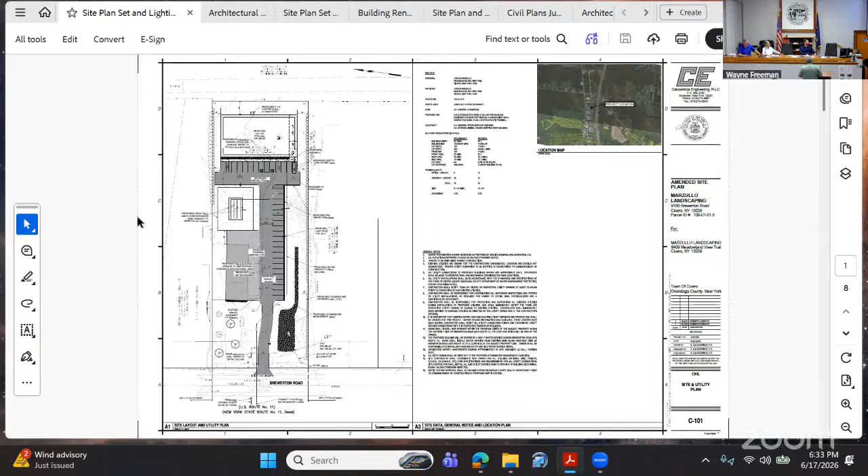As part of that additional structure, the stormwater detention facilities currently on site are going to be modified. A septic system is going to be installed because there will be a bathroom in the new building. There isn't going to be a bathroom added to the existing building, just the new one. So the septic system will serve just the new building. A new water service is going to be added to directly feed the new building.

Additional parking and paving improvements are going to be made on site. Site plans were revised based on engineering review comments, some comments from the board at the last meeting, and some additional comments that we received throughout.

We did add landscaping, a detailed landscaping plan. We also updated the architectural drawings based on comments that came back, relative to landscaping and to the building itself. There were comments regarding the building itself.

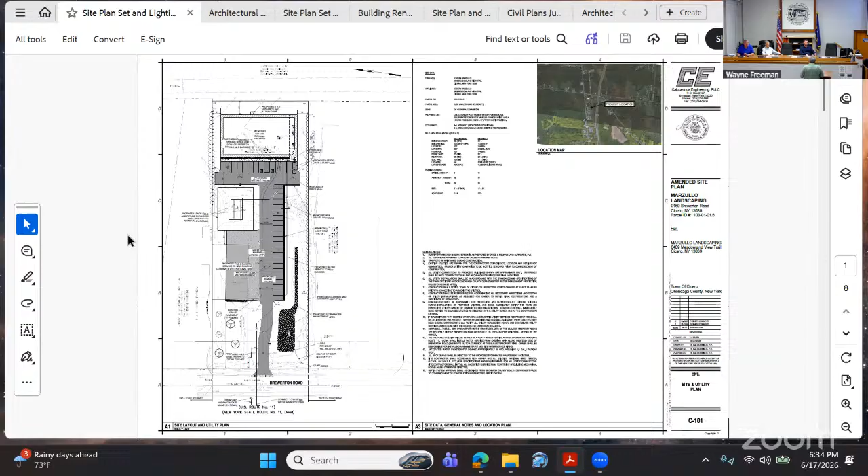One was that we need to add a light at the overhead door at the rear of the property. That overhead door at the rear is just so they can bring in an athletic training facility, so if they're bringing in soccer goals or any kind of goals or other appurtenances, they'll bring it in through that back door. So we'll provide a light. There really isn't an issue with that.

For that back door, on your lighting plan here, you've got lights back there, but you'd have to connect it over. As long as the exit is illuminated on the building, you don't need it directed right there. If you provide enough illumination along the way to the rear, that looks fine.

I think the wall packs that are there would be sufficient, but done in a way to meet it. The overhead door and the man door are right in the center of the building, so they're centered between those two lights.

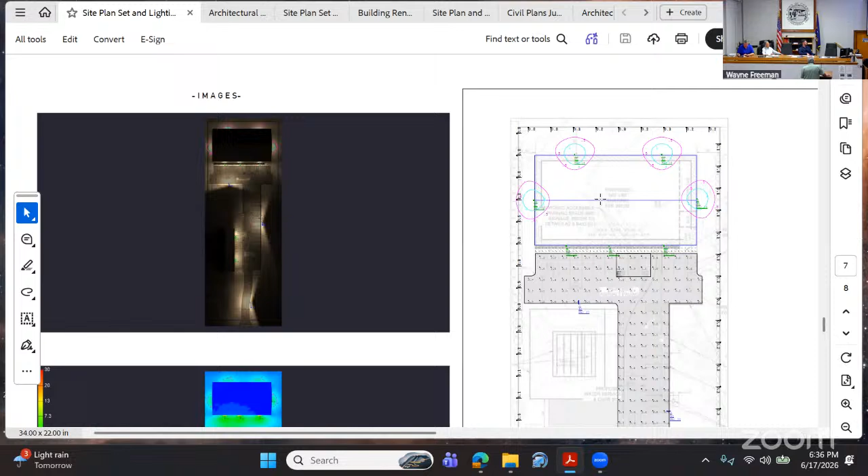The second comment was that the primary facade does not meet minimum transparency requirements, which is 35% for this proposed use. Right now, this graphic was prepared by the building manufacturer. The architectural plans show 4 windows, about 6 foot by 3 feet each.

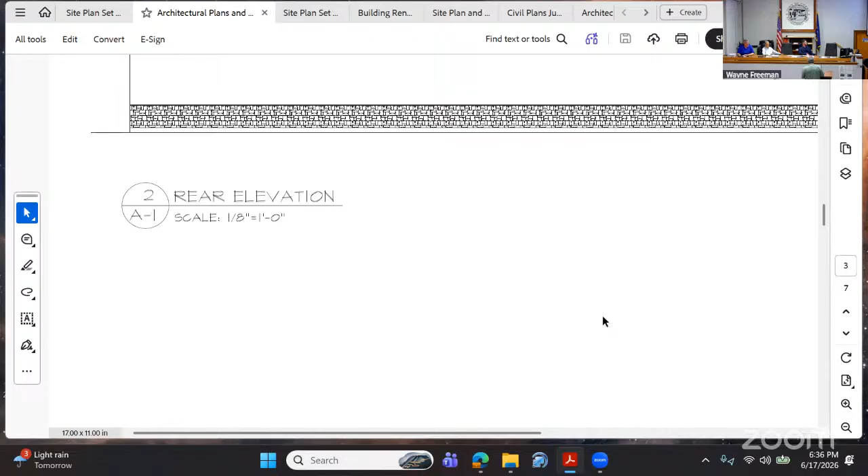That works out to about 72 square feet for transparency. Based on the face of the building, which is 2,800 square feet, the building would be required to have 980 square feet of transparency. So it's either 54 of those windows, or some other solution.

I was just talking to the applicant. He'd consider maybe putting a transparent strip, perhaps in place of those windows, that runs the full face of the building.

To increase that percentage, I don't know that we'd be able to get to the 980 square feet, but we could get as close to it as possible. The building is going to be a metal sided building.

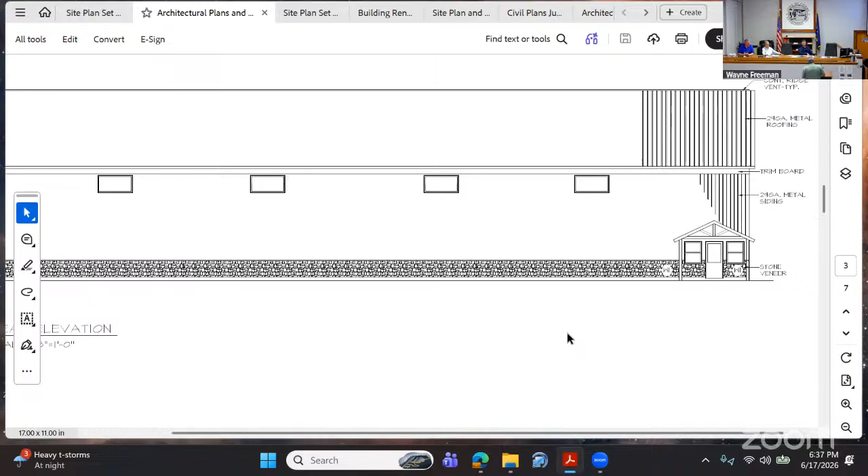It's going to have a standing seam metal roof, I think blue. Sides are going to be metal, gray, and on this drawing it's shown as blue metal, but it's actually going to be probably a stone or faux stone band all the way across the front of the building, just to dress it up a little bit. That's what's being proposed right now.

The last comments were about any vents, fans or mechanical equipment located on the exterior and visible from the road. There's no mechanical equipment scheduled to be on the outside, but there will probably be vents and things like that coming off the building, so we'll need to add and provide those, but I think that's minimal. They're on the right side of the building, behind that entryway.

There are two bathrooms, a men's and a women's, and a vanity. So if there is any equipment in that area, it would be on this side of the building, coming out that side, which borders the Cessna property, an auto sales and detailing facility.

The last comment was just to provide a material finishing plan, still that we provide, but I think the color selection is represented here. Again, it's going to be metal sided, with stone on the bottom.

I have a couple pictures here, but I think the closest thing we could compare it to would be the MCMI building towards Mud Mill Road, at Country Machinery. They have a similar style building, I think it's metal sided, may have a shingle or metal roof, but they've also got a band of stone on the bottom. That's really what we'd be looking at and replicating here.

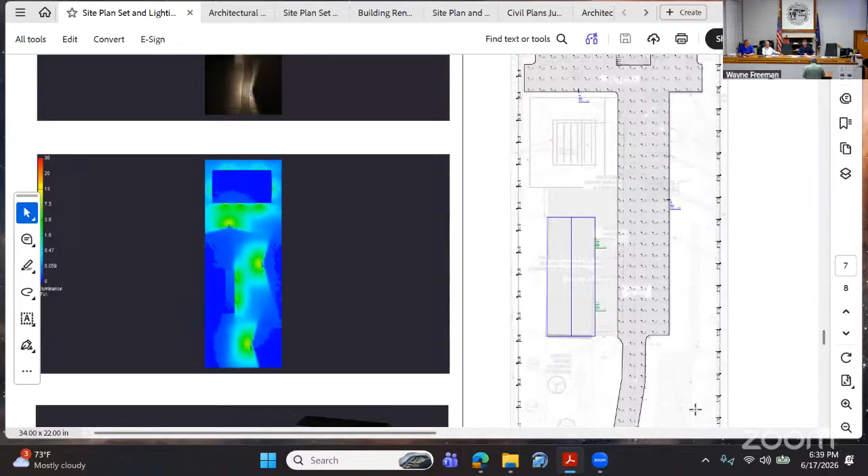Beyond that, on the landscaping comments, I actually failed to thoroughly read the landscaping requirements, but as pointed out, trees are required at one tree per 40 linear feet of building perimeter, which works out to 11. We have 7 trees provided on the property. We can certainly add a couple more trees.

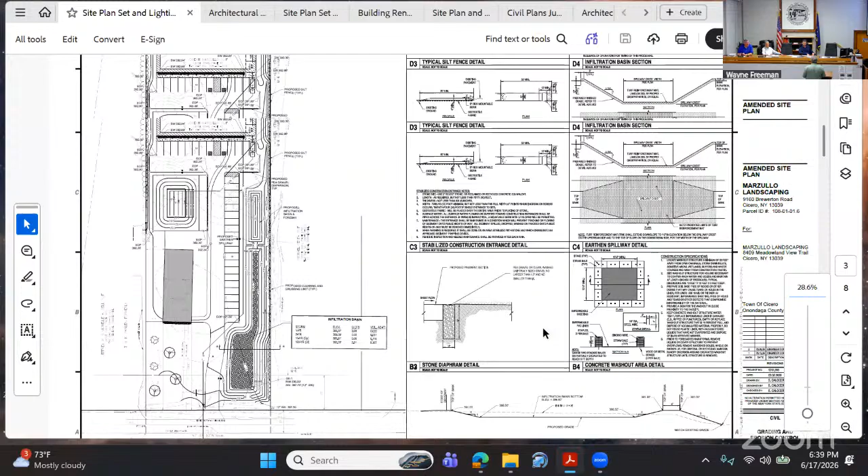Then shrubs, it's one shrub per 10 linear feet of building perimeter, which works out to 44. On the landscaping schedule, technically we call two of them shrubs, but the rest are plantings, perennials and annuals. There's a total of 56 of those plantings in addition to the 2 shrubs.

We can certainly look at increasing that number, but I don't know if you want to consider those shrubs or not, but we do have the front of both buildings, the existing building and the new building, pretty well covered in landscape.

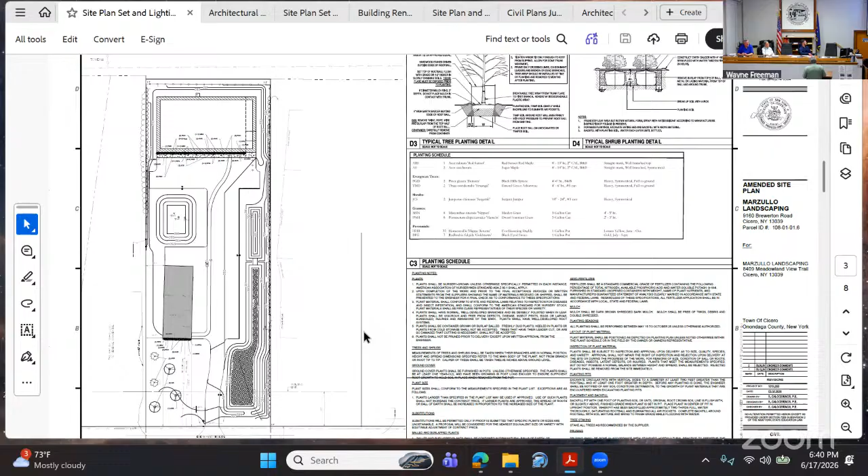That's really it, or are there any other questions or comments? I was going to read through all of them, but you just did. Okay.

Mark, what is your input on this? As far as the landscaping goes, I think it's up to the board to look at the plan and decide if they want to request any additional landscaping, or if they feel what's being done is appropriate.

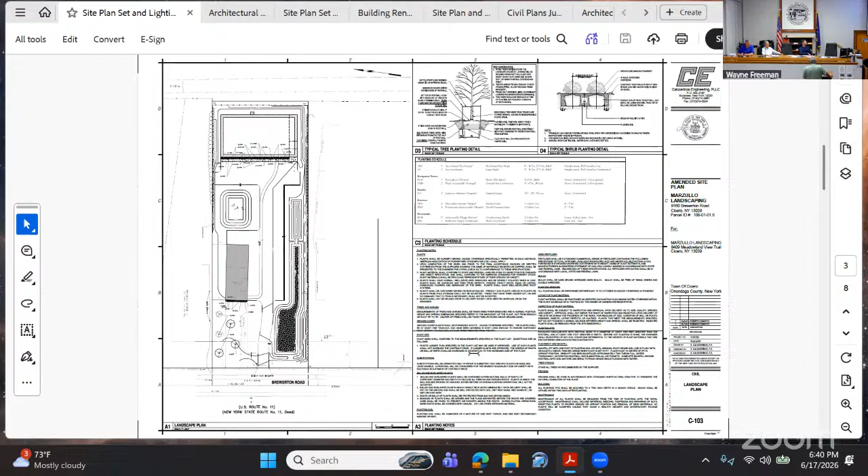On the lighting, I think you're covered. The only comment I had was I don't personally see the need for these lights on the north and south sides of the building. There are no site features there, no entrances or anything in those locations. So the board can decide whether they want to leave those there or not, but I don't see any real use for them. As far as the architectural elevations go, as Steve mentioned, if you look at this plan...

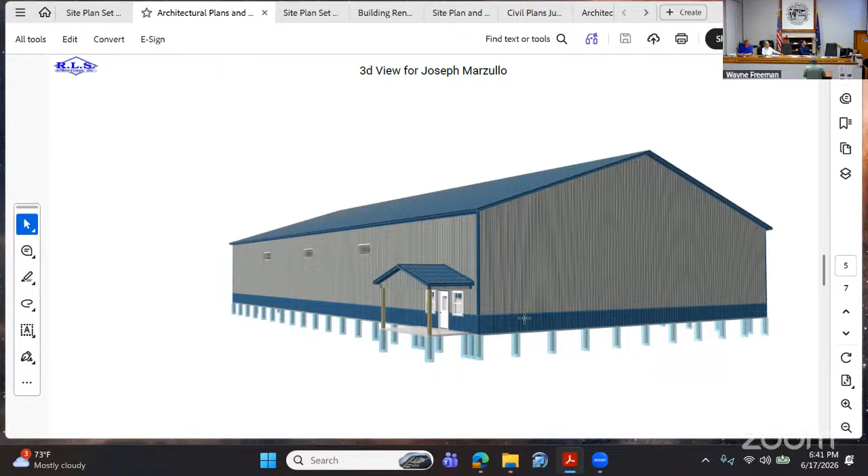This is represented here as blue in color, which I don't know is really the intent, but it's also shown as the metal panel, whereas this is calling out a stone veneer. I think there are some other discrepancies too, mentions of windows and those types of things between the two sets of plans, this elevation and the renderings. I would like to see those resolved.

I think more information, as was in the municipal design review comments, is needed relative to the color of these and what you're actually getting there. So I do think that needs to be resolved or clarified before you approve the plans.

As far as the transparency of the building goes and the amount of windows, again, I think that's up to the board to decide how they would like to have it, what they would like to see there, and if additional windows need to be provided.

So I think the landscaping first, and make a recommendation or suggestion to the applicant. It's the one that is there, but you want more landscaping, or whatever you think there, and if you want the lights and stuff addressed as well.

I'm okay with the landscaping as it is, but Chuck? Well, in regards to the landscaping, I would like to see some more graphics on how the intention of how it will look.

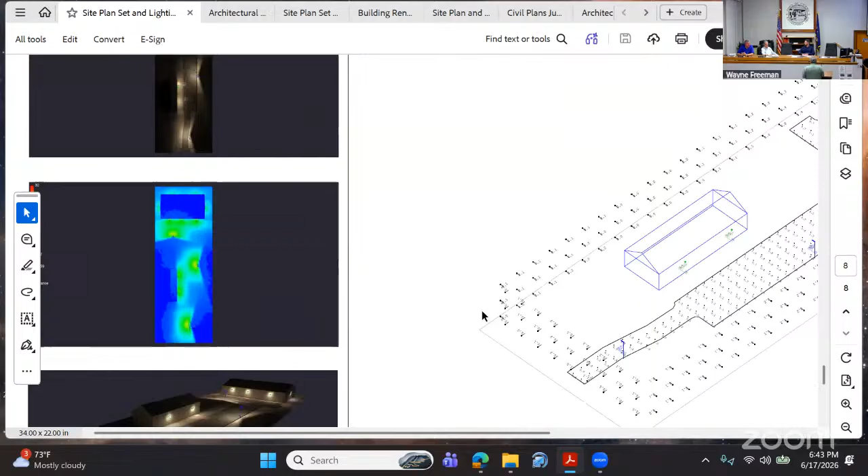Other thing on the elevation there, you're normally looking at two sides. What does the other two sides look like? They might have. And basically, so this would be the front. Right.

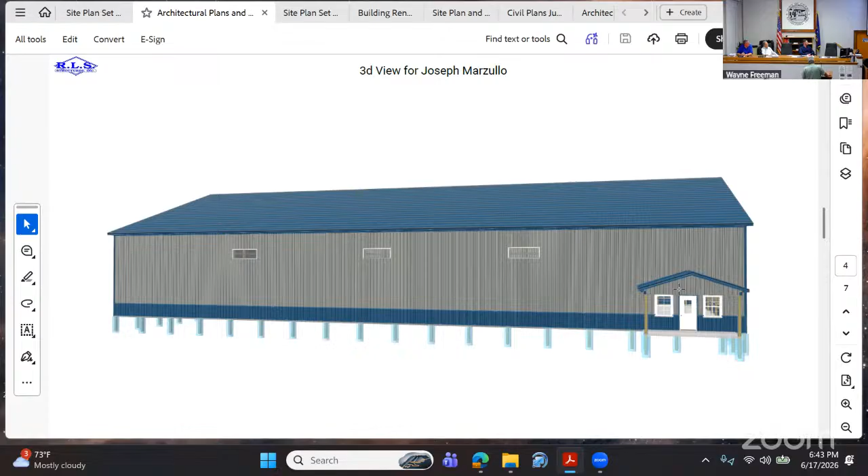Again, the windows aren't quite lining up there. Side, rear, and I don't know if you'll see that from 81. So it's just the one, this is the other side. So those two sides are basically just the metal siding, the rear.

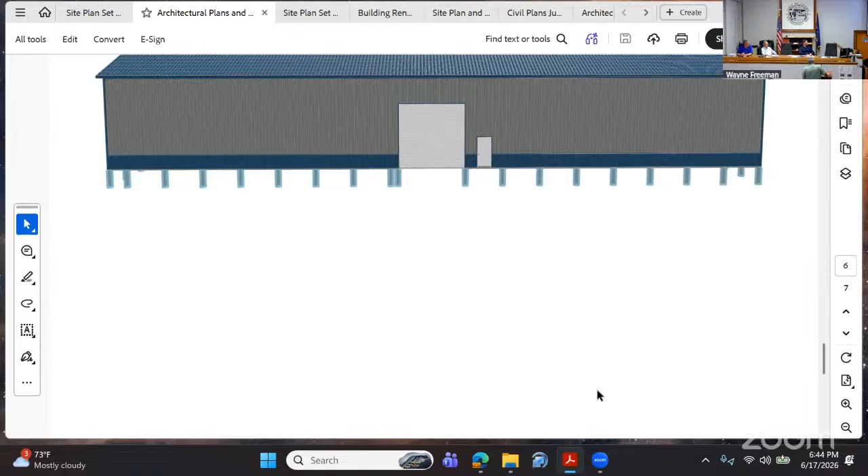And there is the National Grid power line corridor that runs between the building and the property at 81, so there's a substantial strip running through the pipeline. So basically, this is a pretty huge building.

There's only two grade doors and one overhead door. Does that meet any codes for number of people exiting or under? The exit requirements will be based on the total occupancy load of the building, and that's gonna be determined by how the internal layout of the building is set up, and then there are minimum travel distances that are required.

Until I see a set of construction drawings, I can't tell you for sure, but this looks like it's probably okay, and if not, we're gonna have them add another door. Okay, but I'm thinking if there's going to be some sports teams in here, that could amount to quite a few people.

This isn't really a spectator sport kind of thing. Right, this is just strictly a training facility, so they're not gonna have games or matches or anything like that. Folks will come in, do training, we're gonna schedule the time slots, there's not gonna be multiple people getting into the facility at the same time. It is gonna be somewhat limited.

I really would like to see another exit though, because if something happened, people start to pile up trying to get out.

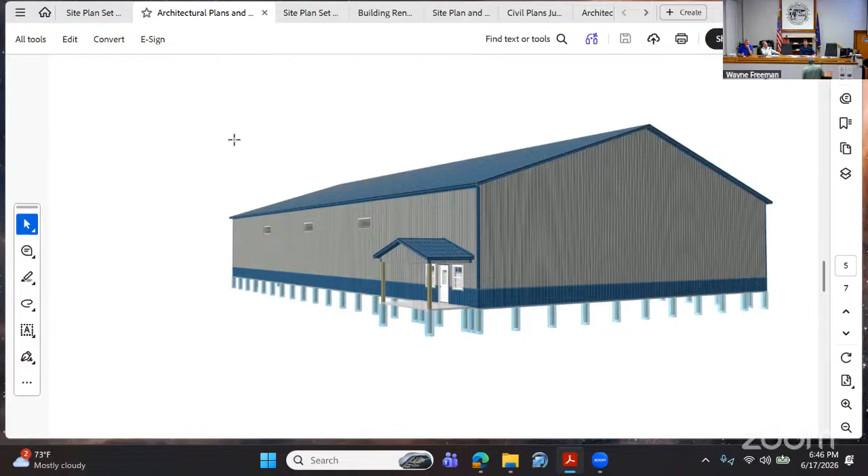Okay, consider- alright, you all set? Well, just one more thing, in regards to lighting, is there any side, not windows, but- let's call them windows for now, to add natural lighting? Or is it all interior lighting inside the building?

Just those three windows currently, at the top. But again, my understanding is the code has a requirement of 35%. I don't know what the percentage is, but it's probably less than 5% with those windows. Somewhere in there.

The size window that's shown on the plan right now would require 54 windows to meet the protocol requirement, and I think that would probably be over excessive. Okay, those are my concerns for now.

Zach? Sure, input. We touching just on landscaping at the moment? Okay, I think I'm okay with the landscaping, I think you did a pretty good job with it.

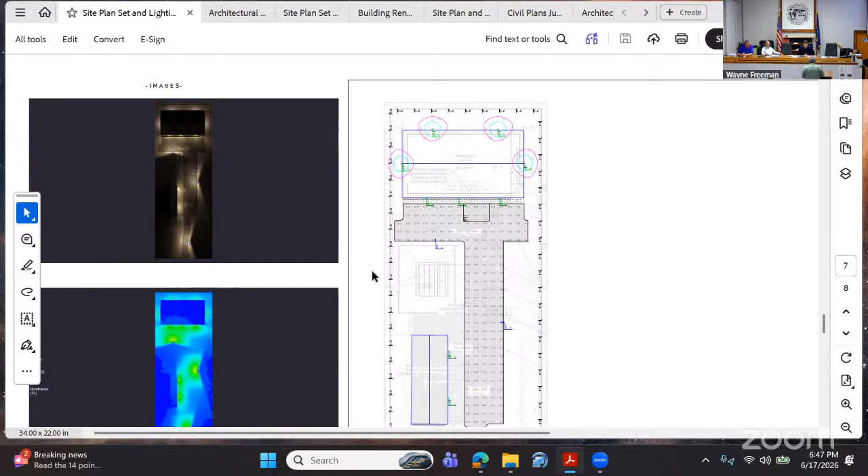Kind of ties into landscaping, I'd like to have a quick conversation about sidewalk. So you're kind of calling for high density gatherings of young adults. I'm bringing this up because I was guilty of it with sports teams back in high school. You might be at a facility where mom and dad don't know where you are, you're on the phone saying hey, I'll just go out to the road, I'll flag you down.

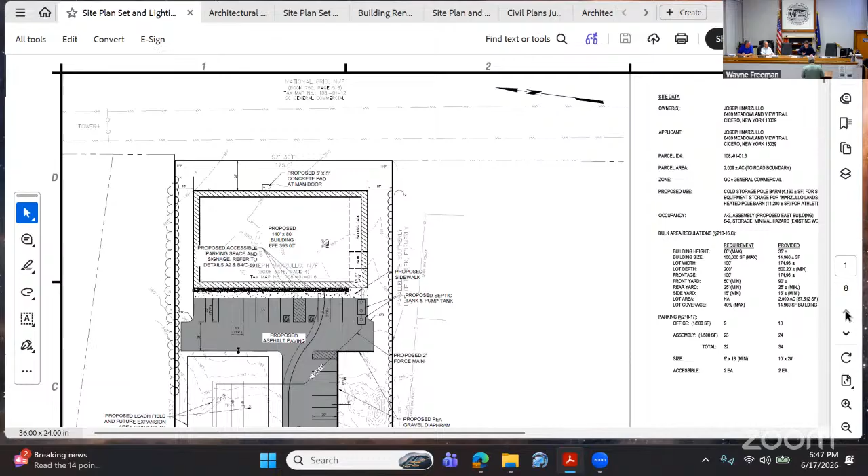You'll see me. Is there any way we can throw a sidewalk in there in the front just to try to prevent, I guess, as many kids as possible from doing what I did in high school?

I understand the argument, the sidewalks to nowhere, but keeping with consistency, we did have a property on Bartel Road with a lower speed limit and streetlights, and we also asked them to put in a sidewalk, which they agreed to do. This is a 40-mile-an-hour zone, there's gonna be no streetlights on the road in that area.

So how would you guys feel about adding that just for safety purposes? So you're looking at roadside? It could be roadside, or it could be kicked in a little bit on the property, wherever we can fit it. I think this section is a 55-mile-an-hour zone, not within my understanding, it's still higher than 40.

Right, okay, maybe this is an older depiction, but yeah, this is. But yeah, even more so if it's 55, that would be partly up to the state DOT, since it's a DOT highway. I don't know, again, you did mention the concern over sidewalks to nowhere, which honestly this would be with the properties that are on either side.

I mean, the applicant's here if he wants to speak to it, but I hate to offer something that would probably end up being a maintenance nightmare more than anything else. We do have the sidewalk along the full frontage of the building, where everybody's gonna be. That existing building up front is still gonna be really a storage facility for the landscaping business.

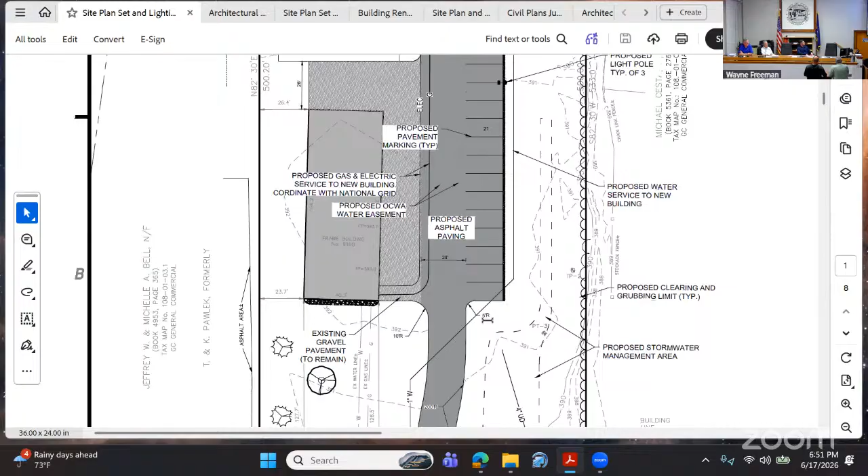It just worries me a little bit being so close to Route 11. Yeah, my goal is not to bring them to Route 11, it's to keep them off Route 11, or off Brewerton Road. So yeah, I don't want a roadside sidewalk.

Do we have room to do a sidewalk between the parking spots along the building and the parking spots? That's gonna be up to you whether you decide where to put it or how to present it, or if you think you have room. But if there's some place where they could flag down a parent that's not roadside, that would be ideal. That's what I'm kind of shooting for here.

I mean, instead of a sidewalk, you just want some sort of pad or something located here, to get them off. Yeah, there. I guess anything to keep them off of that 55 road.

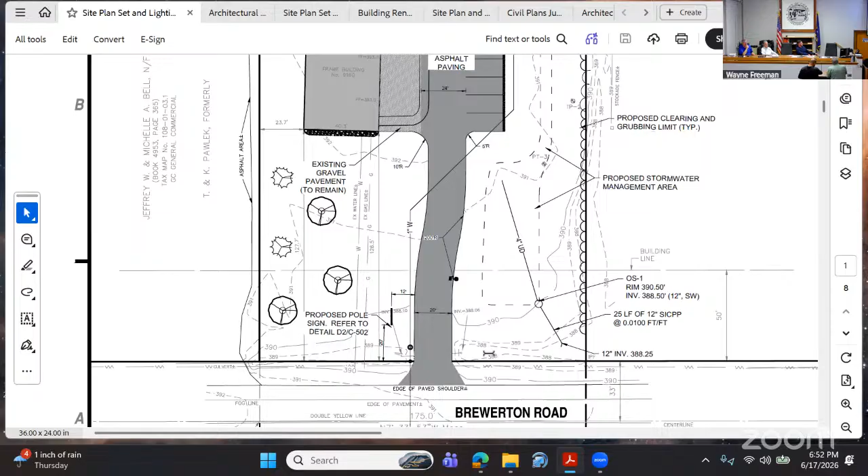We're talking 10 to 20 student athletes at a time, which is the reason that we kind of put that overhang. And that will all be sidewalk underneath the overhang of the building, to kind of have them hang around until the ride gets there, I guess. But that's what we gotta do.

Put a walk in, for sure. I mean, I'm only one vote here. It's just a concern. I just don't want to see... because when I was 15 or 16, you'd walk out to the road, hey, grandma's picking you up, she's never been there before. Hey, you see me on the side of the road with a flashlight?

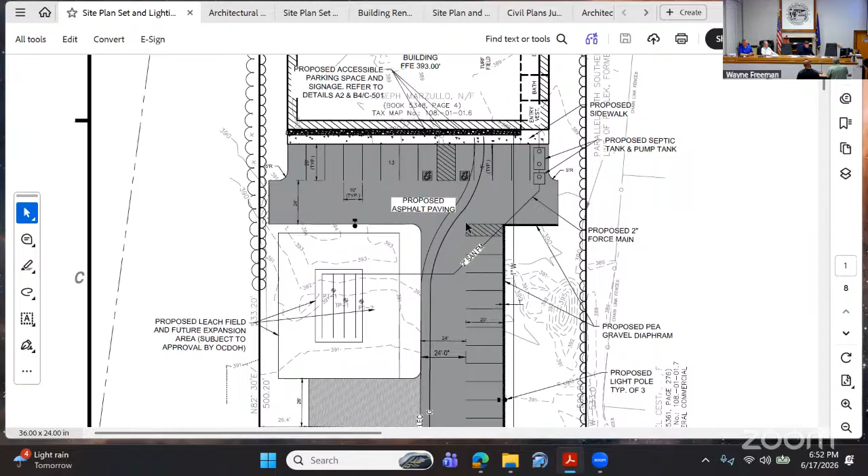Oh, I see you. Just for clarity, we could do something on the north side of the driveway, but on the right side there's an existing roadside ditch that runs along the frontage of the property. Can I see this detention basin? It runs right up through that, so if we did anything, it would be limited to the north side of the driveway.

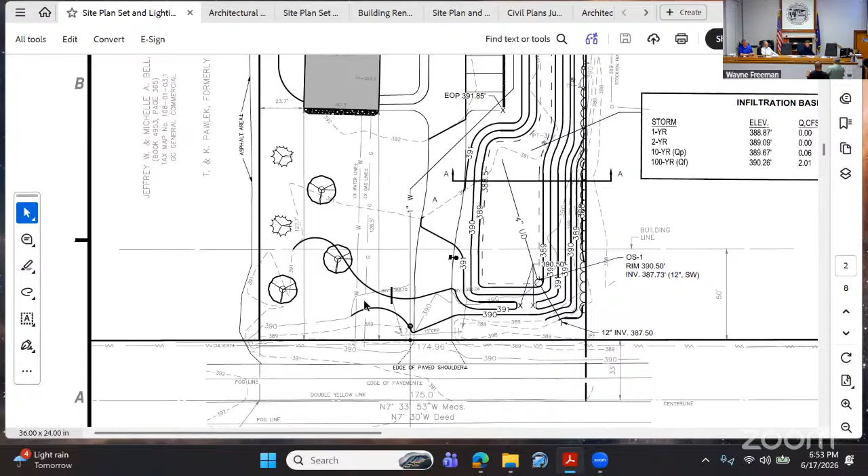Again, maybe a pad or something where they can stand, so it's not in the grass anymore. That'd be very good. If you could give anything just so somebody can stand there as another option to roadside, that would be great. I think that's fair.

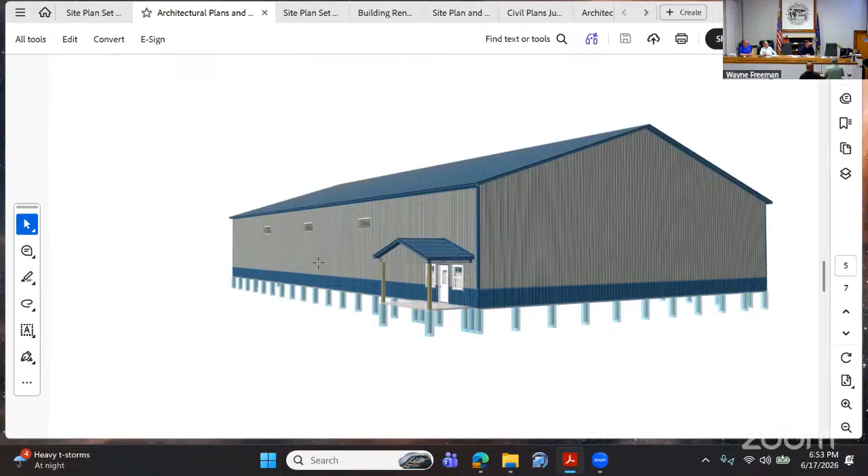Okay, with regards to the facade, what are the thoughts? Do you like that look, or do you want something different?

No, going with the add-on stone on the bottom is great. The doors are one of my main concerns, but the general look, being such a huge building, will make it good or really fall.

It's gonna come down to the building code. As long as you follow the codes, that's great. That's all I had for now.

Zach, for the facade, I think the stone facade that you're showing here would be great. And I agree.

Steve, do you have any questions? No, just a comment - a fire hydrant is being added to the west side of Route 11 to serve fire protection for this building. I met with the fire chief there, and he was good with that location, so other than that, I'm all set.

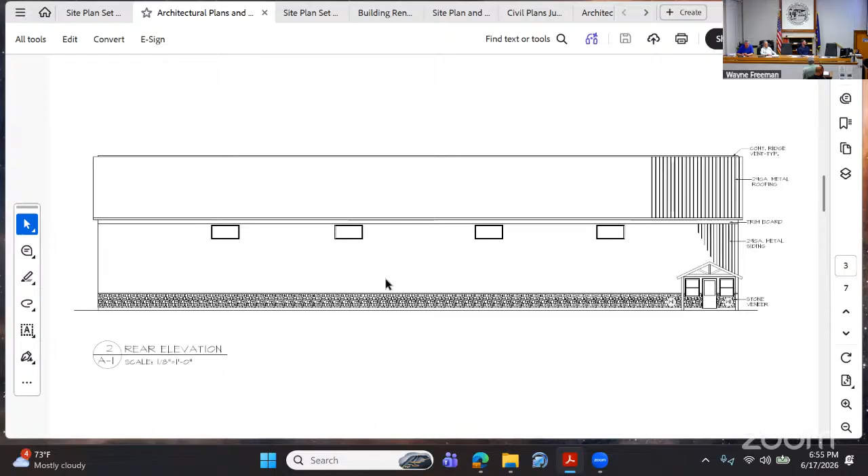Neil, you're all set? Mark, I guess to try and summarize, as far as the building goes, the discrepancy between this drawing and this particular elevation and the renderings needs to be addressed, particularly with regard to the base treatment along with the windows. Is the board good with the number of windows provided, or do you want to see more, larger, or the band that they were suggesting?

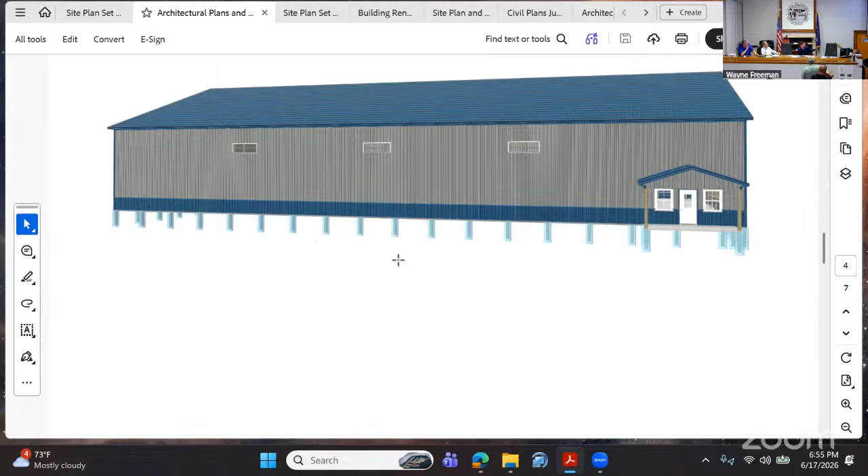I think personally I would not like to see the band. Just seeing post-frame structures like this over time, the bands tend to yellow. They don't look too nice after 5 or 10 years. That's my opinion.

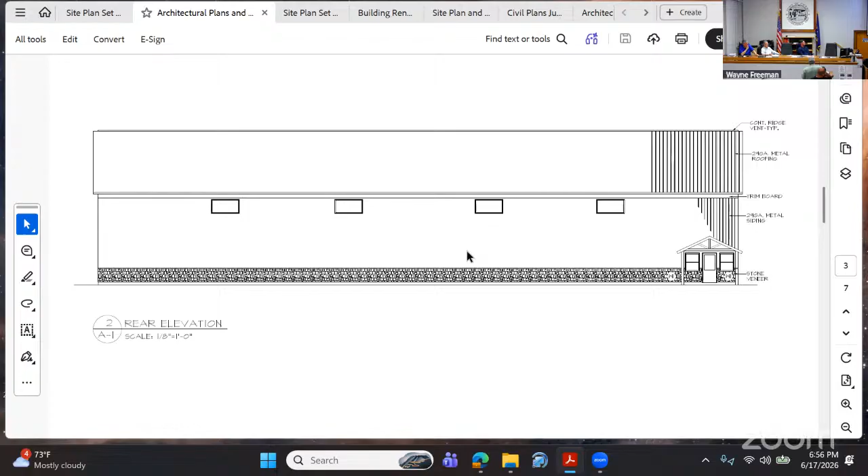Use of the building, I'm assuming you're gonna have adequate lighting inside, you want to pop in a couple more windows, so I'm not hearing a lot of concern with that. Landscaping - it sounded like the board was set, with a desire from some members to provide some sort of waiting area adjacent to Route 11.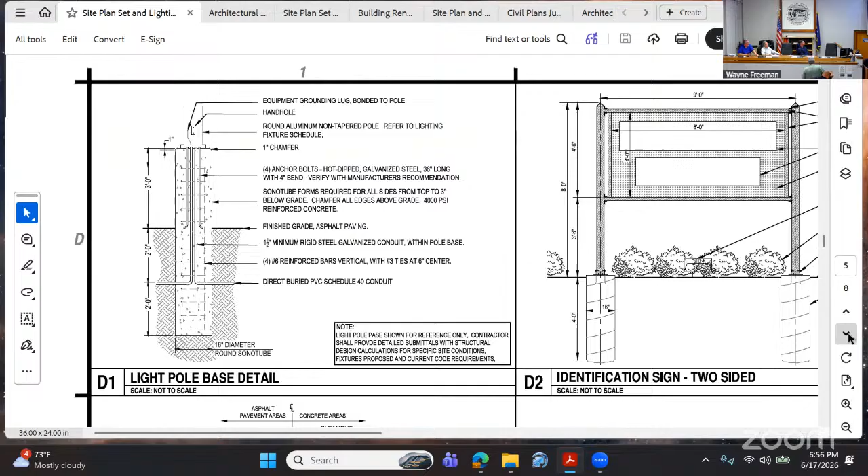Then lastly, a comment I brought up - relative to lighting, is the board okay with the lights on the north and south side, or we first go...

This is the back? No. The south? This is the south. They're showing building lights on the north and south side. If you saw the elevations, there's no door, no windows, nothing over there. There's no sidewalks, no walkways, no driveways - they really don't serve a purpose that I can see.

You have something to say? Go ahead. Being the owner here for a few years, a few doors down north you get traffic in and out - a little motel there, apartment complex - I've had plenty of visitors come onto my property. Theft has been an issue. I had a guy sleeping in my truck one night, broke into the car, all kinds of things.

So that's more so why I recommended that with Steve - more so a surveillance thing, so when I'm running 24-hour surveillance I can actually have those sides, north and south, illuminated so that you can see what's going on.

All right, so I don't have an issue with that. That would probably be a good idea for security if it's needed. More so a security - I guess I just ask that the correct lights get put in, as opposed to what got put in on the previous building, one of which is gonna show to be replaced on this building. So if the appropriate lights get put in, I don't think it's an issue.

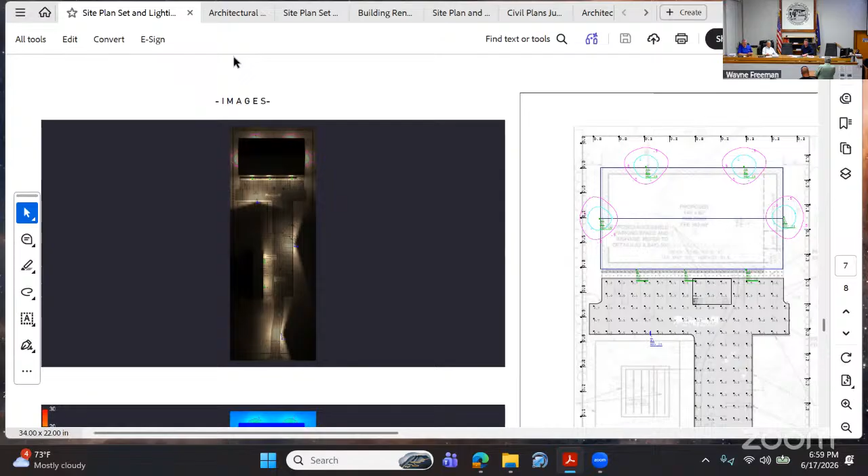Okay. All right, thank you. Thank you.

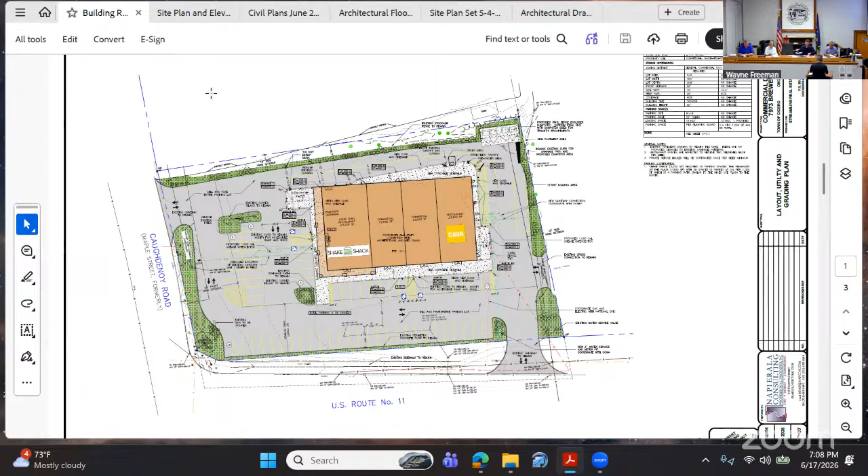In the next agenda item, this is Next Choice Property Holdings, for a proposed baking goods store, Holland Farms, at 5866 State Route 31.

Good evening. Oh, wireless, fancy, you guys upgraded. It's been a while since I've been here. Members of the board, nice to see you again. Christian from Kepling and Freeman Associates.

Heidi gave us a comment letter last Thursday. We addressed it, submitted it. She also sent a comment letter on Friday. I addressed it, I have it in hand. I'd like to distribute some 11 by 17s to you. Absolutely, we can work wonders, but not everything.

So basically what I did is I put together a response letter to those comments, comment by comment. And I have the plan obviously updated with the subtleties, and I'll go through this comment letter.

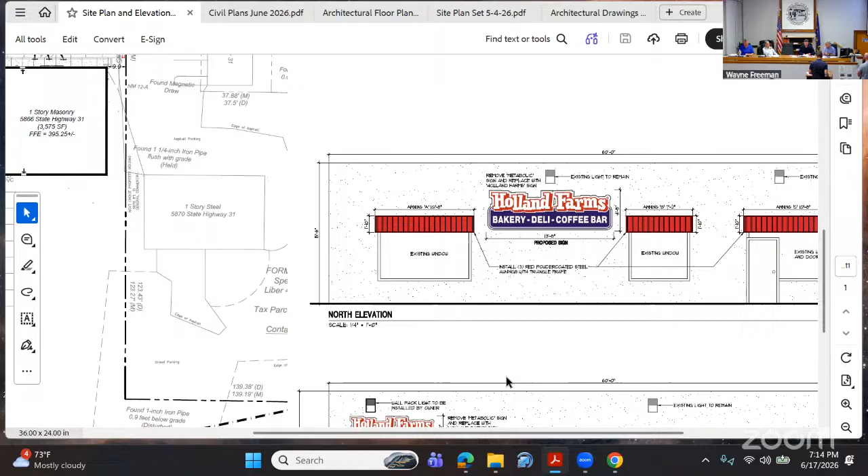Number one, confirm if existing site lighting provides sufficient light levels throughout the existing parking area and dumpsters. The site lighting provides sufficient lighting throughout the existing parking area, except in the northwest corner because of the broken exterior light, which will be replaced. KFA has provided the location of the proposed replacement light - we need to add Mark's swapping of the fixture in there as well, so I can note that.

There was also a comment mentioning dumpsters. Ryan and I talked, and the dumpster area is going to be serviced during daylight hours. The back of the site is sort of forested - there's no people or traffic coming through there, and there's also no electric pole back there. So we were kind of hoping to just not put a light fixture there, and see if the board was open to that. I personally think you can let the critters in the woods hang out back there and take the trash out midday, have the truck come by before 9pm, and everyone's happy and we don't have to buy a light fixture. So leave that one up to the board.

I think one of the comments relative to the dumpster was whether it was sufficient for the use - that right there seems to indicate it's not. Are you going to have two dumpsters, one dumpster, what are we doing there? What do they operate out of in Manlius, Ryan? I'm not sure - they saw it, we walked the property together, talked about it, and they said it was adequate for what they're doing. I'm not sure why Metabolic always had their dumpsters like that, but we built that for them based on the specs that were approved for the site plan. We looked at that too - it's kind of embarrassing.

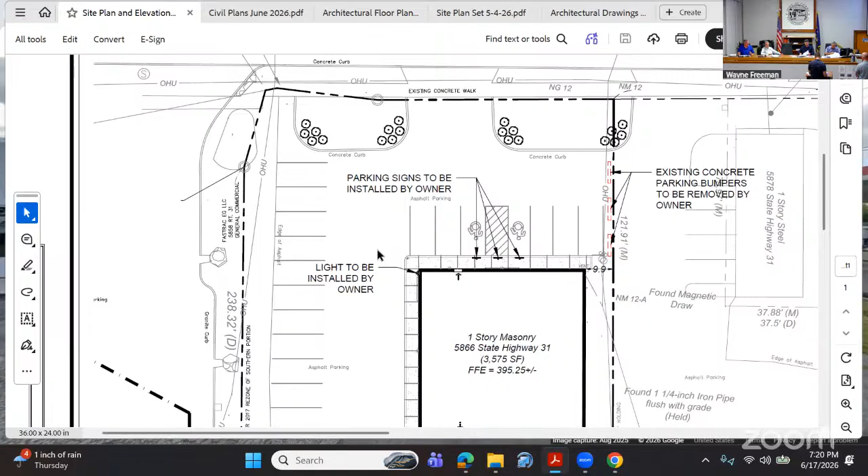Anthony's noting that the signage is beyond the approved code requirements for signage. I understand in the last meeting there was discussion of making the signs actually a little bit bigger for impact, to raise the aesthetics of this box building, giving it a little bit of flair, quality and identity. So with respect to the board, we would request approval of the plans as they are with signs beyond code, because we discussed it in the last meeting and it seemed like everyone was open to it then.

No, we were not open to it then. I'm part of everyone, and I distinctly said I do not approve that. You do not want larger signage than what we showed? I wanted signs like you were showing last time. It was just Chuck and I commenting - Chuck mentioned maybe a bigger sign, and I said absolutely not, but I'm willing to listen to the other board members. Let's hear it, whatever we'll do either way. I'd like to see the signs stay the same size as they previously were. I like the awnings, okay - keep the signs the same size.

The lighting's okay, but I'd like to see part of the way up the wall with the faux brick or whatever. I'll let Ryan clarify that one.

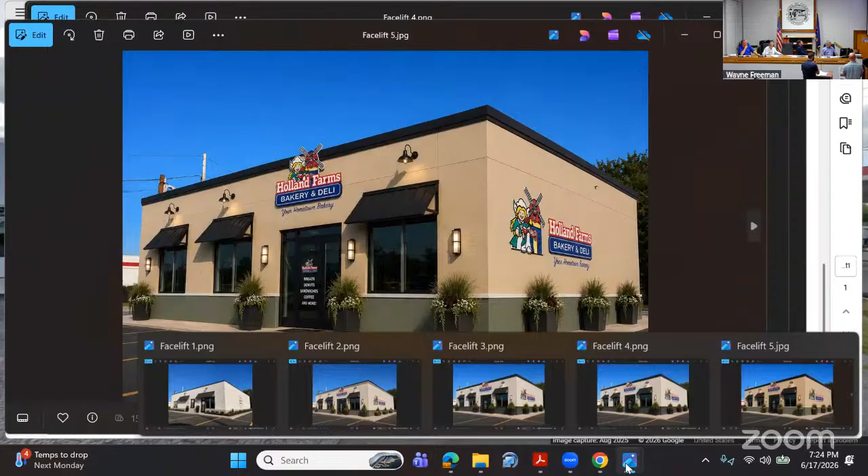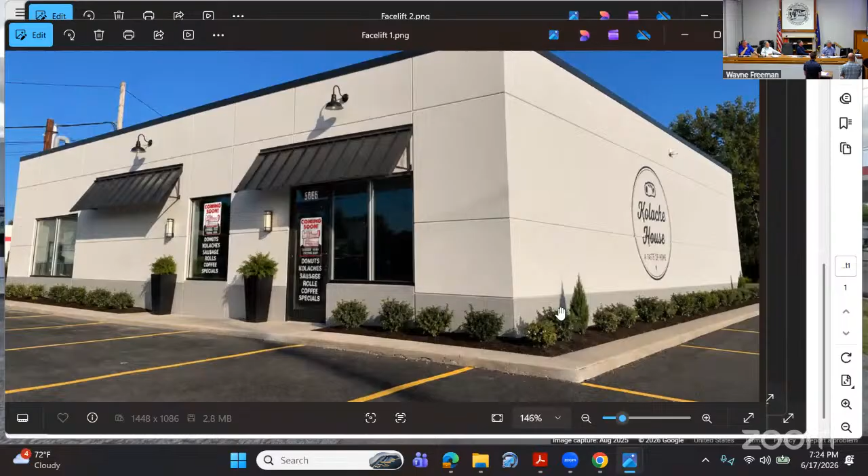So you see the top, the crown that's already in place, just changing the color. Really simple. And then putting a thin brick veneer, I think they call it - big stones. Yeah, full veneer, faux. This would not necessarily be this, I guess.

But I don't know, so again, these were provided by one of the board members with some ideas of what the building could look like if it were to incorporate these. And we're not gonna tell you which one tonight. I'll let Ryan.

Something built like it, it's nice. Be nice. Yeah, I like that.

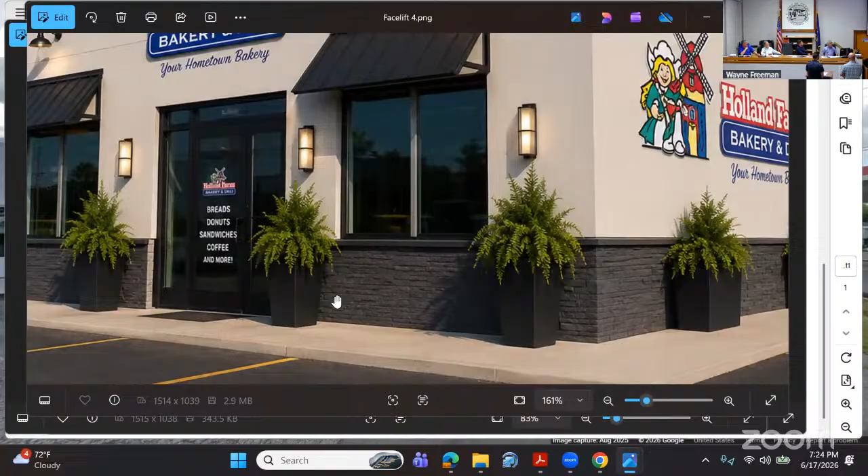I thought two weeks ago you said you'd kind of work with me, given the fact that we did just do a renovation. I understand there's new requirements, but the renovation had no play with me whatsoever.

What's that? The renovation, the approval that we got 4 years ago, that has no play with me. None. Okay. What I was hearing from you all was that you can't do it. It's not possible because of the existing siding - what is it, EIFS, the type of material you were dealing with - such that we couldn't do this. But you can.

I mean, you could do anything, anything's possible. It's just we have to rip up the building and spend a lot of money on it. No, you don't. Look, it's really common. It's not as complicated as you might think. I got that from 2 sources, including our architectural engineer. You can reach out to him.

We don't set the design standards. It's done by the elected body, the town board. And we went through these modifications and design standards to help enhance and improve the town, and I totally agree with them. Enhancing the town is good for everybody.

It attracts more business, which is good for selling more half moons that are very good. It's good for the existing residents. So it's important to us, and we have to work with existing structures more so than a newly built site. But if it's not overwhelming, which this isn't from what I'm being told, then we're gonna do it, because we're not gonna see this again for maybe ever - if this bakery does really well, it'll be there forever. So this is our opportunity to get it as close to right as possible.

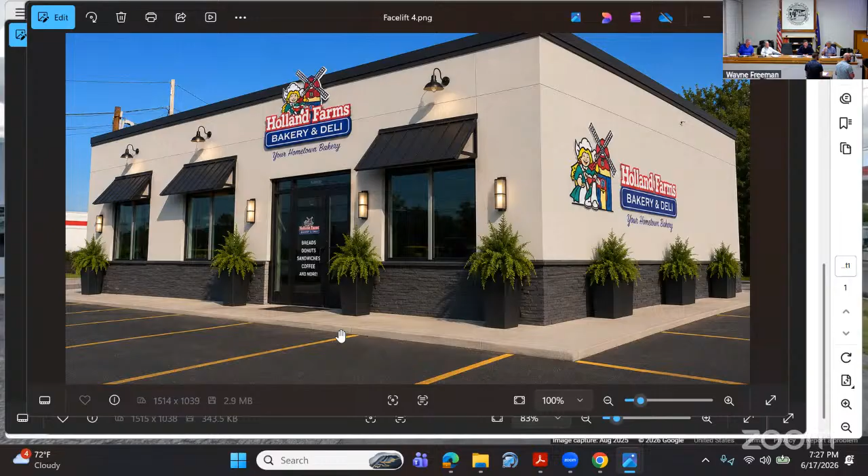What about if I did the same thing that I did with our neighboring buildings? If you pull up Google Maps, you could see we did steel paneling, metal paneling. We're also proposing a steel awning in red, or maybe not red, but the materials would match. It's sort of an industrial feeling area. I know it's not necessarily screaming bakery, but we're dealing with a building of a certain caliber and aesthetic already, right next door.

How much of a cost savings is that? I don't know, honestly. It's just easier to install, versus dollars and cents necessarily. I mean, we're a mom and pop shop, it's gonna be like me doing it. I can get that done. It's gonna cost what it's gonna cost, but I would hate to put fake stone wainscoting on our building. I just don't like it, and it's heavy.

The tenant doesn't like the aesthetic of it, and I personally wouldn't like to do it because I'm not familiar with it. I would rather do the metal, and I think that looks nicer. It looks nicer than the existing, that's for sure. Nicer than the stone, I'm not so sure about that.

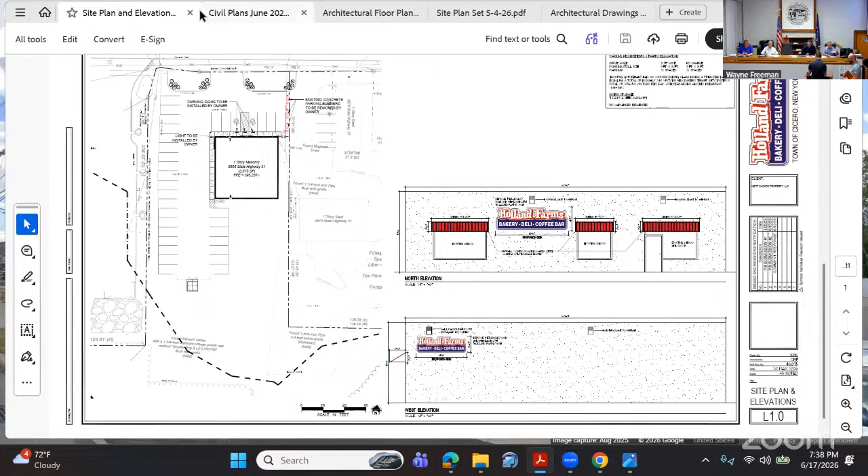Next item is sketch plan review. This is for a proposed 74 unit apartment building at the Cicero Commons, Brewerton Road.

Good evening. My name is Ed Martin. I'm a licensed engineer with Passero Associates. Our headquarters are located at 242 West Main Street, Rochester, New York. I'm here tonight representing Dakota Partners' application before you. Also in attendance is Mark Palat and Jeff Davis. Mark is a representative of Dakota Partners, and Jeff is counsel for Dakota Partners. In the event that you have a question that's best answered by one of them, I'll invite them forward to answer.

So the application before you is a rather straightforward one. The site is just north of here on Meltzer Court, just west of Route 11. It involves a 7.2 acre project area to construct a 3-story, 74 unit apartment building serviced by 2 town road curb cuts, public water and sewer, both available along the frontage on Meltzer Court, a private on-site stormwater management system designed in conformance with the DEC stormwater discharge permit. We have a 111 space parking lot and on-site asphalt area for emergency vehicle circulation surrounding 3 sides of it. You'll note we have wetlands in the area, but the development does not encroach into either the wetland itself or, in the case of the western one, the 100-foot buffer -- that's a DEC wetland. The one to the east is a federal wetland.

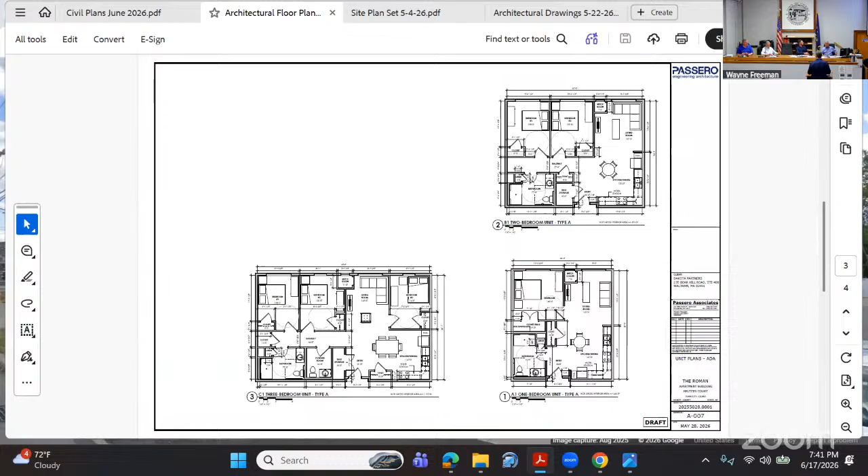We understand that you are advisory to the town board, so we welcome your feedback. We intend to take your feedback, refine the plan, and come back. Hopefully you can send on a recommendation to the town board. So I guess with that, we'd be happy to answer any questions that you have.

Actually, before we get into that, if I can ask a question -- Onondaga County Planning Board, will we be getting comments through you, or will they be sending them directly to us? So you will get a copy of their comments, but you also get them through us. Thank you.

All right, we'll open it to questions. Jim? I'm good for right now. Chuck? Yes, am I? It's early on. Zach? I am all set. Just a comment about your e-bike battery charging cabinet -- very cool, I've never seen one of these. Very impressive. Yeah, I have questions.

So I understand this is a PUD and the town has flexibility relative to what can and can't happen. But in the underlying zoning for RM, when they talk about necessary parking spots based on the number of units and bedrooms, it would require 160 parking spots. In this presentation, there's 111. Yes, sir. So, like I said, I know we have flexibility with our board. That's a pretty significant discrepancy.

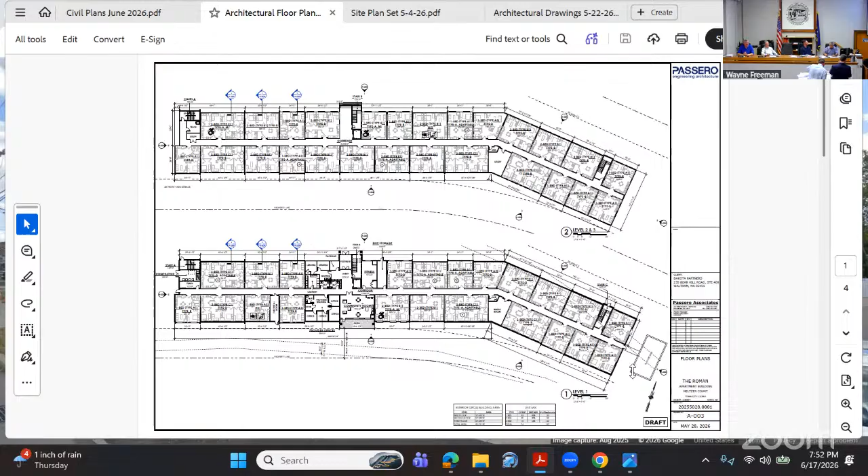No, there isn't - that's a unit. That is a unit right there, kitchen and living room right there. The other end has the tower. No, you got it right there, Mark - you got it right, you had it right.

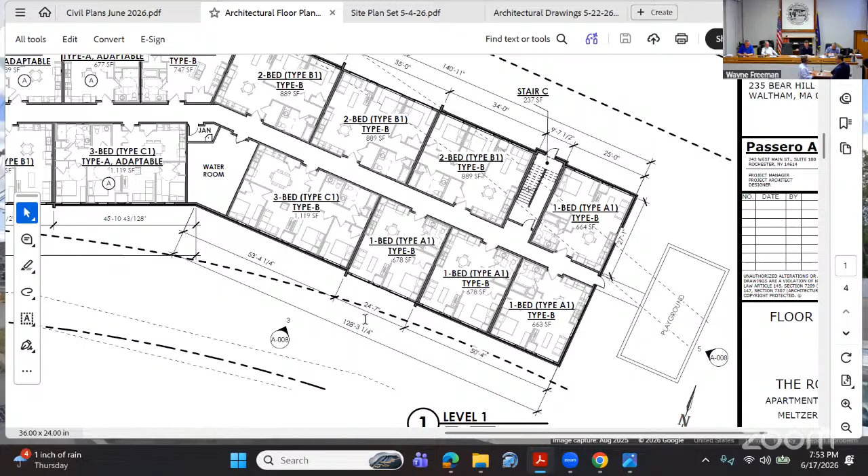You might have the PDF of the original presentation that showed that different elevation. Yeah, I think that's where we tried to incorporate a clubhouse at that end, I think. Well, that clubhouse - that's gone.

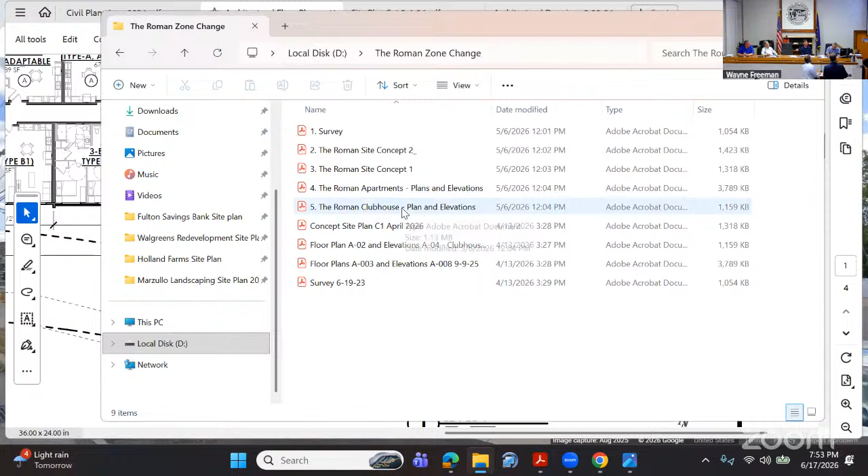What was your concern, Mark? Just the appearance of that one side. Yeah, I think part of it again was - there's no crown on it, and there's only windows on half of it. There's a kitchen portion of that area, so we probably wouldn't want to put anything there, but we could put them on the area where the living room is.

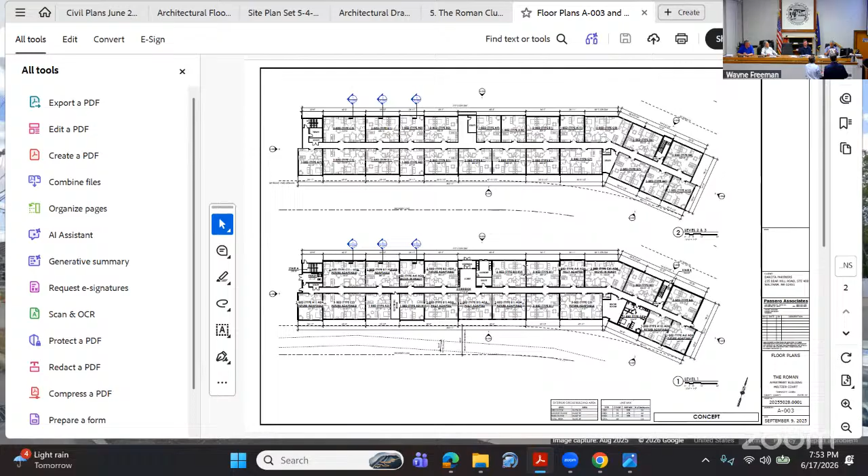That was the original - yeah, that looks like... that's pretty. Yeah, that was with the flat roof design. Yeah, we have some windows right there, that's where the living room area is - those probably can get put back in there. Yeah, that had the offset, but...

My point is, I think that side needs to be dressed up a little bit, that's all. Okay, thank you.

Well, if you could use some perspective, like... there it is. I'll talk to that, yeah, they have it - they should be able to do it. It's all computerized now anyways, no time at all.

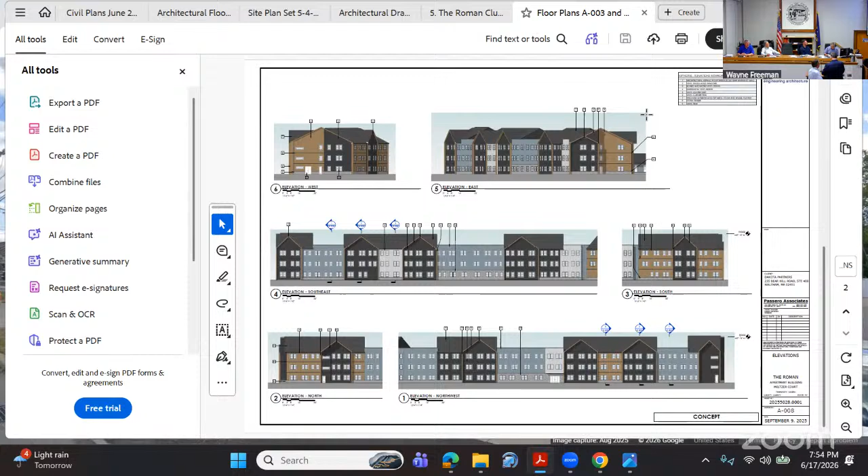Mark, can you go back to the existing front elevation, please? The elevation - yes.

So, crown molding along the front, which is a requirement. That'll be in the architectural review, I'm sure, but I just wanted to mention that.

Okay, you said just along the front, crown molding, yeah? Can we go halfway with it? I'm just kidding. All the way around is good. That was good.

Looks great, by the way. The building looks great. Obviously we need units for people to live in. So we got Micron coming, so it's definitely going to be used.

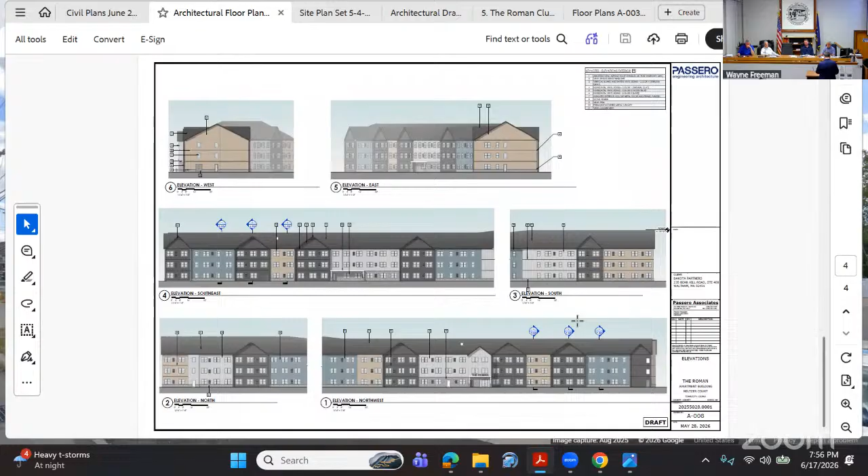Not much right now. I know we talked a little bit last time about fire protection and the fire department's requests for certain things and the attic. Either if it's not gonna be sprinkled, at least alarmed, that type of thing. But we've got a lot of time to talk about it. And that's part of one of the questions from the fire department, those storage cabinets for the chargers, which I submitted. Yeah, that's it for now.

Thank you. I believe they've got a full submittal with the SWPPP and everything. I believe we did submit this. Yeah, I'll do a full review and get comments out to you. Not that I want to change your process, but if you ever want to reach out, I'm always available to talk and discuss.

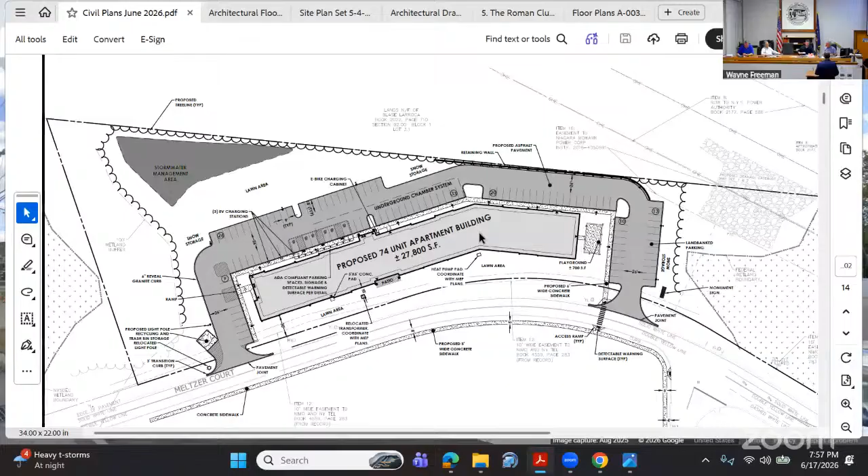Terrific. Anything else, anybody? You guys good? Anything else from you? No, sir. You're all set. Thank you very much. Thanks for your time, appreciate it.

And the next item, last item on the agenda, is for CNY Golf Shop and Range. Address is 8457 Brewerton Road. Good evening, Tim Coyer, Ianuzi and Romans Land Surveying.

Good evening, Tim. I learned how to golf here, by the way. It was a long time ago. What took you so long to get here? Took us a while.

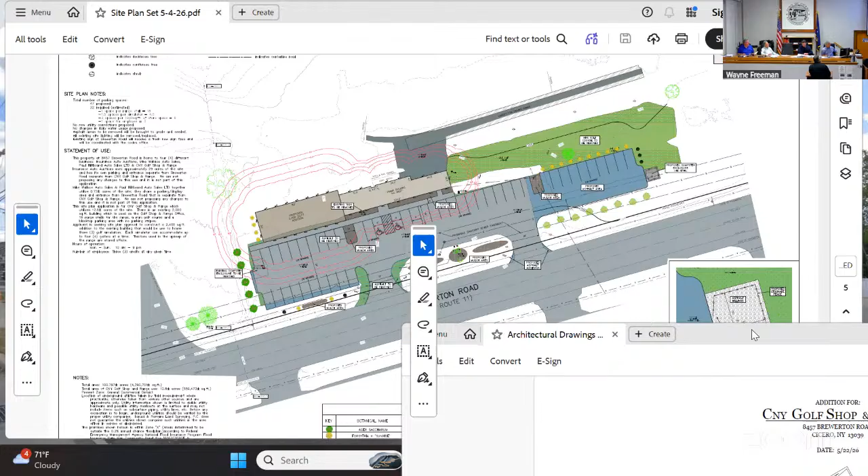You have elevations? Yep. So again, this is the existing building and the addition would be here. Questions?

So you're expanding the parking lot? Yep, we have a breakdown on the one sheet as far as how many parking spaces we're actually proposing. I think it's a total of 47 that we're proposing.

Anything else, Jim? No. Yeah, well, that addition building looks an awful lot like what we talked about in the first agenda. Understood? Very good. But is this gonna be that much taller than the existing one is now? Yep, it's gonna be quite a bit taller. You can see the difference in elevation, yes.

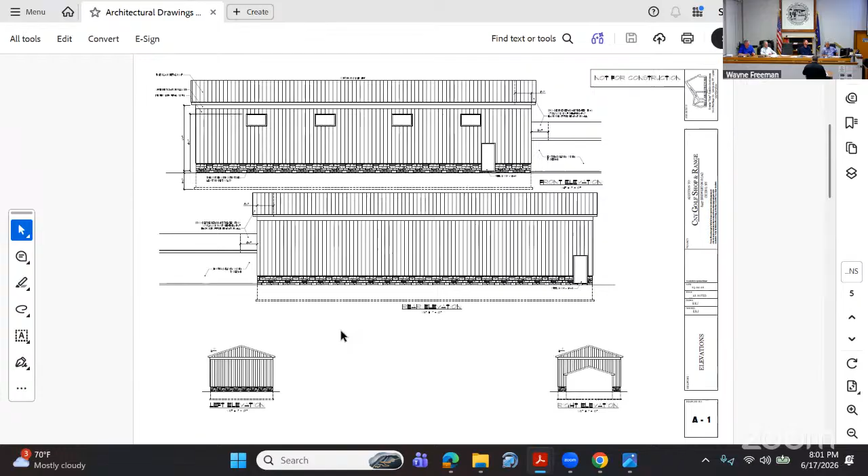Is it also going to have a green front like the original building, maybe? I think they had on the architecturals a gray-blue. Hold on a second, I think it's here. Keeping the color to match the existing building, maybe? That's what I was gonna... you're recommending... oh boy, I just thought of that. Pewter gray, it's pewter gray that's on the architecturals, yes, on the new building, on the new addition. But is the other one gonna match? Yeah, the other one was remaining the same, it's stripped right now. Come on up, I was going by what the architectural said, I apologize.

Now, I represent the business owner, can we have your name please? Monique Peterson. Thank you, I represent the business owner of CNY Golf and Range, and Dan Meltzer is the owner of the land and the buildings.

So what we are going to do right now, before we start the addition and get your approval, is we plan to redo the facade of the old building. Mike, our contractor, has already taken down the cedar shake and adjusted everything. We've taken away the windows and the doors to make it more secure because we had a lot of theft around there.

We've also changed it to the 3 foot stone facade that you like, that goes from the ground up. Then it will be the gray steel, then 10 inches of white frieze board and white fascia and soffit to the new roof, which is shingled in gray, light gray, and dark gray. So we're planning to make it match the new addition.

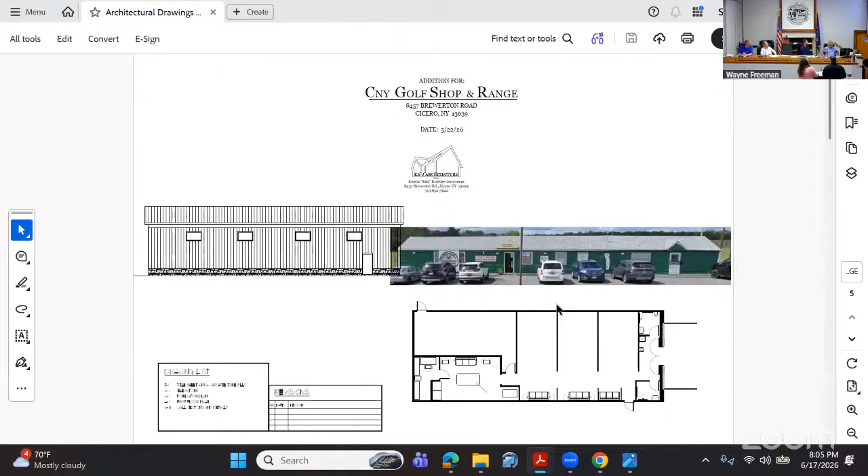Do you have the floor plan in the packet? I didn't hand that out, but Mark's got it. Here it is, this is what she's talking about. I wanted them to walk in those 2 double doors, 3 foot each side, they swing open into the old shop. And when you walk in, that's where the circles are, so you go to the left a little bit and then straight, and then there's simulator 1, 2, and 3.

So coming from the old into the new building, with the 4 feet offset on each end, it was just more straight coming in from the old building. What's the total length of it? I can't read it. The length is 80 foot.

Yeah, you need to explain. That existing building, it's tough to do that with... you get what I'm saying? This is providing your change of plan. The new building needs an offset technically with the design standards.

Just to go back to your original comment, were you specifically concerned about an additional strip of landscaping here, versus not necessarily caring about the straight face, more about the landscaping? Correct. Okay, I'll talk with my client about that, specifically looking to do more landscaping here.

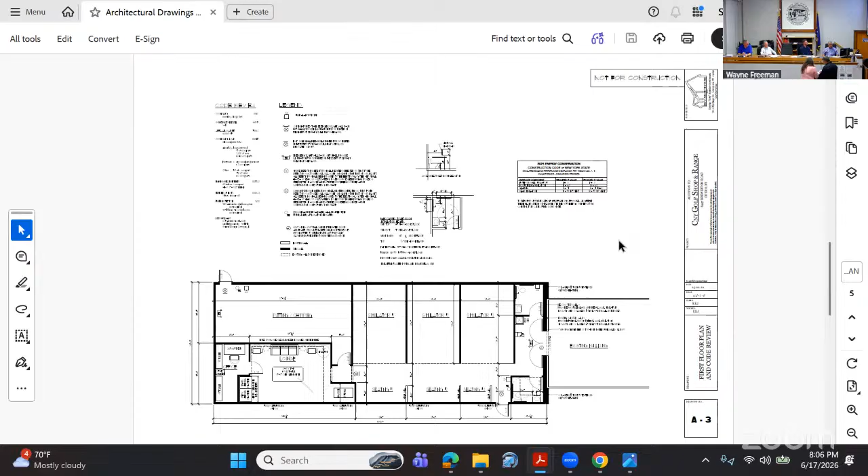Well, where the walk is, we'll have to push the parking down. Okay, but we have room, we should have that covered. I thought that was an option as well, but it makes sense now that you want to have everything equal. I just want it centered, so when they come in the old building, they can look straight ahead into the new facility. It's just eye pleasing in the old building and also going into the new building, and then there's a straight path.

I like your train of thought. Thank you.

Doing the landscaping in front is perfect. We had the parking areas, so the landscaping would offset that—wouldn't be any problem to put swaths of black cedar mulch with flowers in front, maybe 2 foot by 8 foot, all along the front to the doorway. Even separate flower beds with black mulch and flowers would be pretty.

Anything else? No. Chuck, did you say the bottom stone or brick on the new building would continue right across to the old building? Yes, so it all ties together. Yeah, it'll be beautiful and perfect—to the eye it would look straight and level. That makes sense. I like the look.